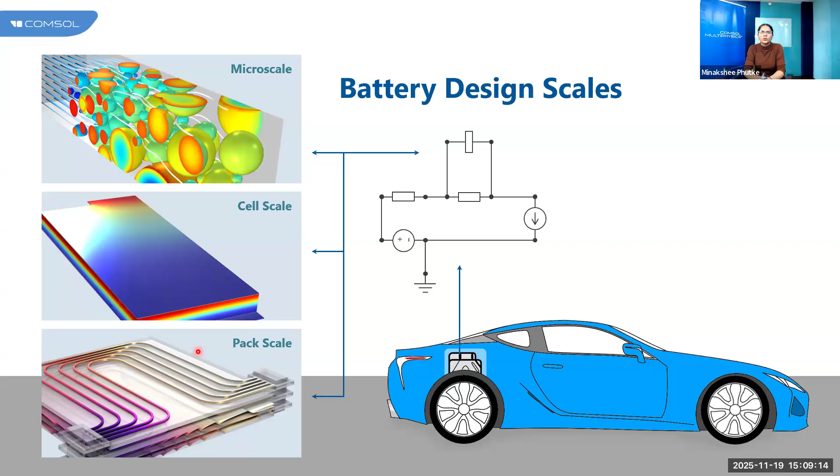On top of that, in case you have a battery pack which is installed in electric vehicles and you want to take the approach of equivalent circuit modeling, that scale approach is also available in COMSOL Multiphysics. So no matter what your objective is for battery modeling and simulations, you can work in COMSOL and make use of the different modeling types available, which are shown here in this presentation.

Here from left to right, when you move from heterogeneous to lumped model, your model becomes more and more approximated. Your accuracy is reducing. However, your computational cost is drastically reducing. So your computational time will reduce if you take the approach of the lumped model compared to the heterogeneous model.

In case of the heterogeneous model, which is a more sophisticated model compared to other models, you can actually use your geometry, like you can give a particle size distribution of your electrode, how the particles are distributed in your electrode. You can give the actual tomographic information of your electrode structure. The microstructures can be captured, how the porous structure is created at the micro scale level.

You can capture that, and here you can do all types of studies, from fundamental studies, EIS studies, to parameter estimation or kinetic studies, or testing out some new battery chemistries, or mixing different cathodic materials for your battery in case of a lithium ion battery. All such applications can be dealt with here with the heterogeneous type of model.

And in case you don't want that much accuracy, and you want the simulation a little faster, you can switch towards the homogeneous model, where the famous Newman model approach is available. The Newman framework is there in the homogeneous model, where you can take average porosities of the various components in your battery, from electrodes to separator, and taking these average values, you can do simulations from electrode level to cell level to pack level.

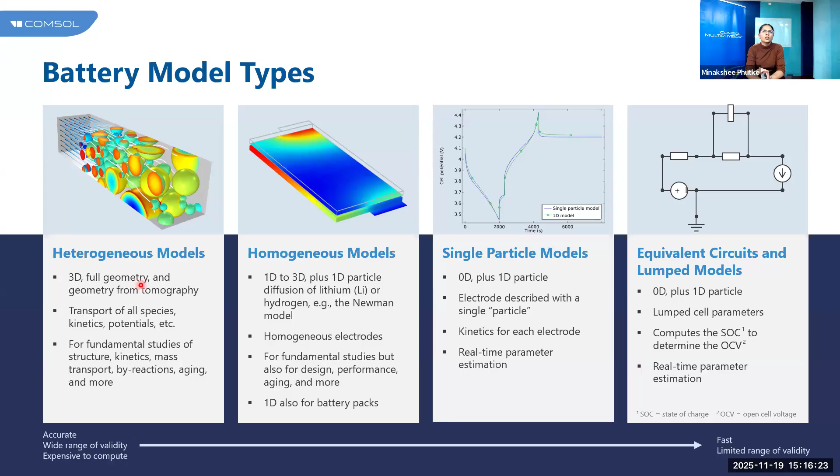So let's get into the surrogate model. We know that surrogate models are accurate and faster options compared to the actual physics-based model, where these simpler yet computationally inexpensive surrogate models can be trained to capture the behavior of your system, which may be very complex in nature. This surrogate model will help you create models which capture this complex behavior of your battery, while still giving you a faster and accurate solution.

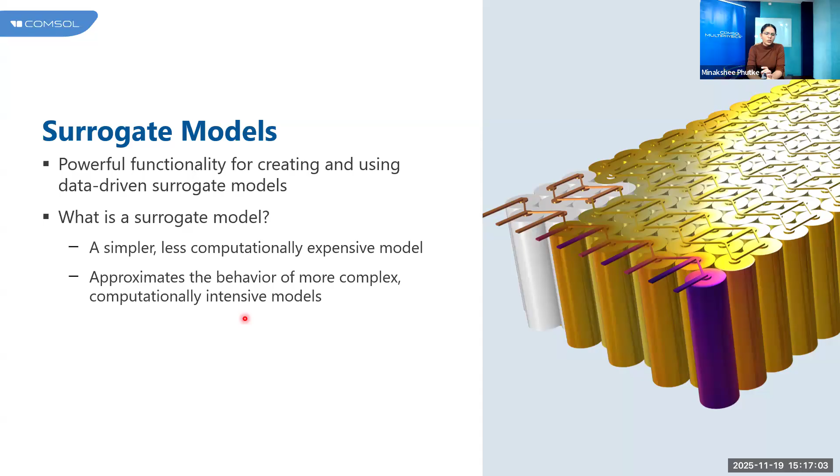So how can you build this surrogate model in COMSOL? Let's take a look at the workflow. First, as I mentioned, you can create a full model based on any of the earlier model types we discussed so far: lumped model, Newman model, or heterogeneous model.

So you can first create the full model, then create a design of experiment method. We use this design of experiment method to create a digital data table, a design data table. Once you create this design data table, you give inputs and outputs. So there will be data when the battery system is subjected to various charging and discharging conditions, or when you change some inputs for the simulations, showing what the output will be when you run this full physics-based model. All that data will be captured in the design data table.

Now, this design data table will then be used for training the surrogate models. The surrogate models will be trained on the data created from the simulations of the full models. And then this data can be used to evaluate the digital twin or apps.

In case the design data table is created and you want to train your model somewhere else, you can export this data to third-party tools. Or there's another way: you may have some data already and want to import that into COMSOL to train the surrogate model. That option is also available. So you can import data from a third party as a design data table, then train the surrogate model in COMSOL and create the digital twin.

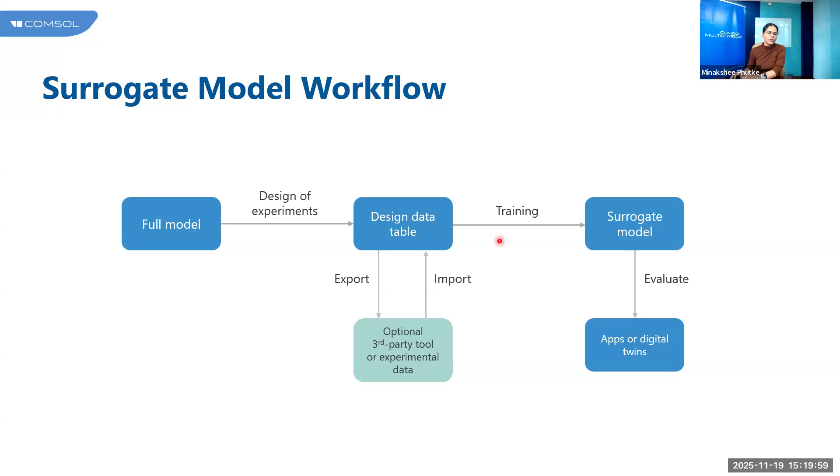This option is useful in case you have some experimental observations, large data from the system. You can bring that into COMSOL Multiphysics and simply use our surrogate model techniques to create the digital twins. So we offer a platform for any of the exercises mentioned here, and how it can help us is what we'll look at now.

In surrogate models, we usually create these models to build simulation apps which work much faster compared to the full-scale physics-based model. If you change some input, you need to wait to get the output—every time you change the input, you need to simulate the model again. So the computational time can be very high when doing this manually.

But once you create the design data table and train your surrogate model, you now have a lookup table where the input-output behavior is already captured, and your model is trained based on that data table. So it knows the system very well, and once the surrogate model is trained, you can get the result in a couple of seconds. This fastness of the surrogate model is particularly useful for creating digital twins. You can also use the surrogate model for uncertainty quantification and optimization of your battery modeling and simulations.

So various options are available, and all these options can be used for the various applications for creating apps or digital twins, so that you will get efficient battery modeling options with COMSOL Multiphysics. So let's take an example which we will discuss in detail in today's webinar.

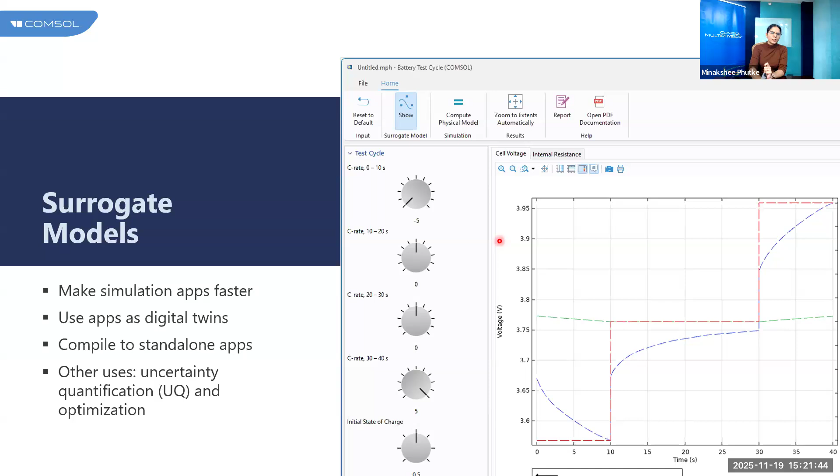That is the battery test cycle app, which we have created within COMSOL Multiphysics environment in order to demonstrate our capabilities when it comes to surrogate modeling. So we have considered a full Newman model in 1D, and there we have given the test cycle in 4 segments: 0 to 10, 10 to 20, 20 to 30, and 30 to 40.

In these 4 different segments, if you change different C rates and even the initial state, like if you are interested in checking the changing initial state of your battery, all these different things can be given as input. Then this model is created, and in a couple of minutes we'll check how we have created the model, and it gives results in a couple of seconds.

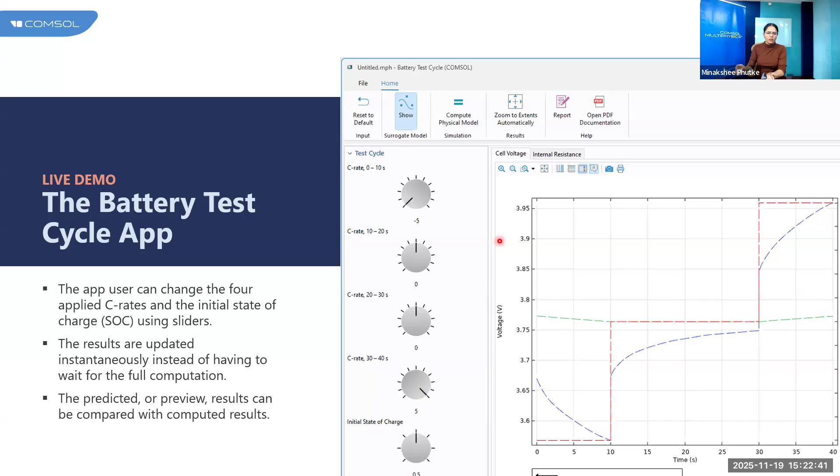So this is the model. This is just a glimpse of what we can do with COMSOL Multiphysics. Let's check here. In this animation, you can see that just by rotating the knob, you are instantly getting the result of potential, how the cell potential is changing when you change different C rates in different segments. And if you change the initial state of charge, you can see how it's affecting the battery behavior.

So this you can see in this particular example, which is for an NMC graphite battery, which is trained based on the Newman model for these 4 different segments of time, where by giving different C rates, the change in potential is observed.

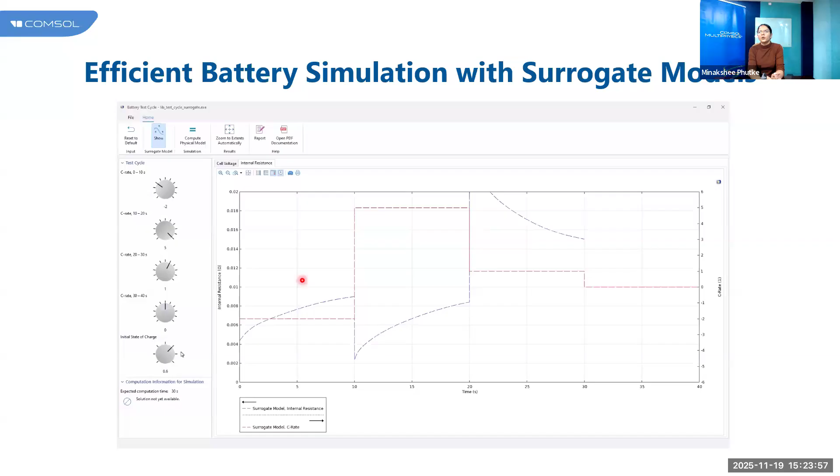Like that, you can quickly create such kind of apps in order to study your battery system in detail. So before going into what steps we have considered for creating the model we just saw...

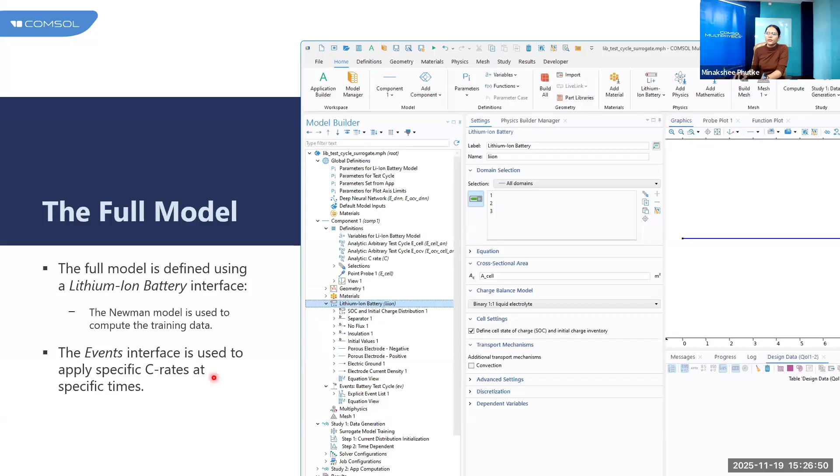Then once the full model is set and you have one simulation, later on we can add this step, which you are seeing over here, which is surrogate model training. When we switch to the demo part, I'll also show the further options for surrogate model training that are offered by COMSOL Multiphysics.

So here you can see in the screenshot as well that in the surrogate model training step, we decide what are the input variables and what are the properties we want in the output. So what quantities of interest we want as output parameters can be selected over here. What inputs we want to change can be selected here.

So here you can see that, as I mentioned, there were 4 segments, from 0 to 10, 10 to 20. So in each segment, what kind of current you want to draw, or what kind of current you want to supply in case of charging, can be given with the C-rates. It can be negative or positive based on discharging or charging. And you can consider that SOC is one of the main input parameters. So initial SOC will also matter.

So we can give these as 5 inputs, and we can take outputs such as the potential of your battery, that is E cell, and the OCV of your battery you can calculate. So these are the quantities of interest for output. So we can select quantities of input and quantities of interest as output over here in the surrogate model training option.

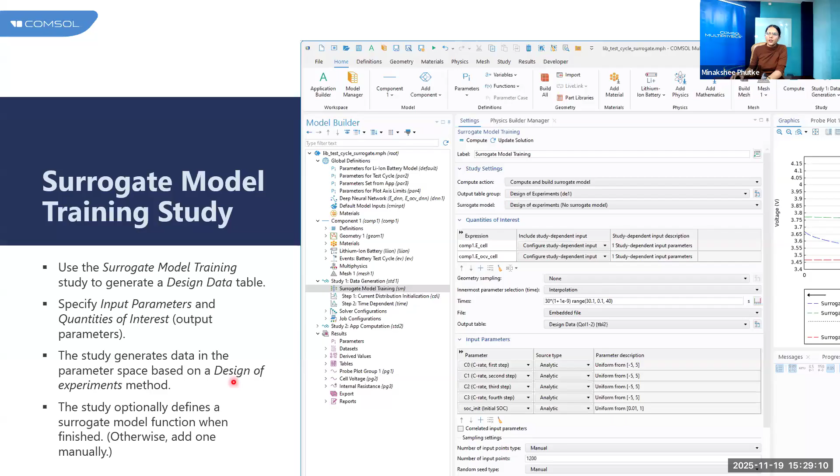So there are multiple options available. Multiple activation options for training are also available in COMSOL Multiphysics. So the different surrogate model functions available in COMSOL are deep neural network, polynomial chaos expansion, and Gaussian process functions.

Here in this particular session, we'll discuss the deep neural network functions, but the other functions which are also available, such as polynomial chaos expansion and Gaussian process, we will not discuss much in detail today, but you can check out these two options as well. And we do have these three different function options in COMSOL Multiphysics.

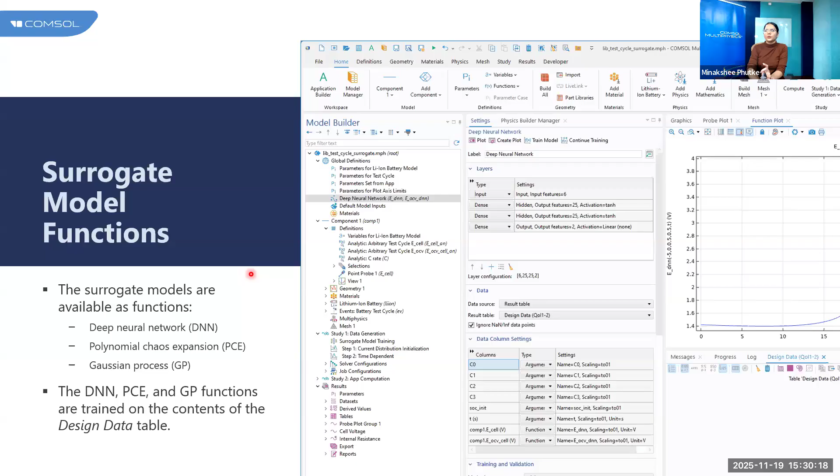Deep neural network functions come with the COMSOL Multiphysics software. However, for PCE and Gaussian process, one might need to buy add-on modules such as Uncertainty Quantification. But only with COMSOL Multiphysics and the Battery Design Module, you can use the deep neural network and train your surrogate model. So you can create the design data table, and the deep neural network can then be used to train and create surrogate models.

Let's go into more details about the DNN configuration, like how the DNN works. So in deep neural networks, what is most important is the layering. So you have some inputs and outputs. Once you have a design data table, how your output can be correlated to the input with different layers can be captured with the DNN layers.

These hidden layers of the DNN can be of any number. Typically, if you increase the number of DNN layers, the model becomes more and more complex, and there is a possibility of overfitting your data. So there might be a need for an educated guess to know how many hidden layers you can use. A quick rule of thumb is that you can start with two layers, and then if you feel that your surrogate model is underfitting, like your model is not good enough to capture the complexity, you can further add layers. And inside layers there will also be a number of nodes or neurons.

So now, how many neurons should be there? For that also, prior study, prior knowledge of the problem you are modeling is needed. Typically in case of battery simulations, with prior knowledge of what the problem is typically used for, with how many layers and nodes, you can take it as a guess value, and further with study you can get these numbers. We do have 2-3 different surrogate models there. You can take that as a reference and create the number of hidden layers, and give the nodes.

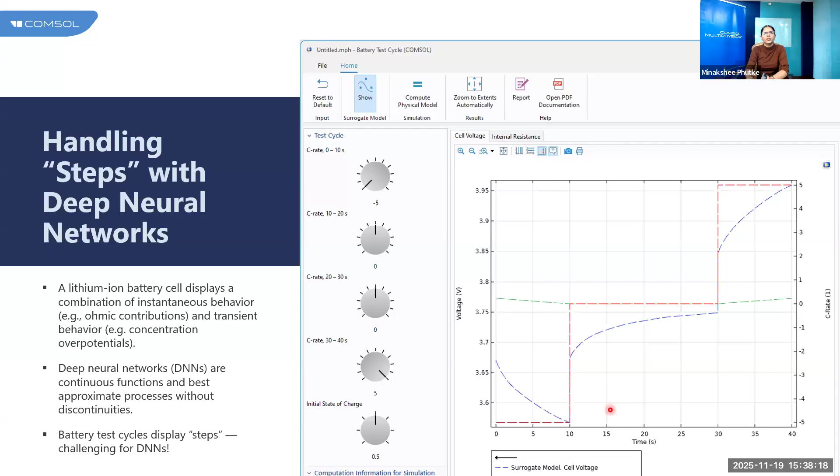So in the technique I just mentioned, time series stitching, we have different time segments in which we are giving different C rates. The states can be different in batteries, because once we switch from charging to discharging, the battery initially reacts instantly, and later on it reacts slowly. To capture this instantaneous and transient behavior, if we use a single DNN function, it might oscillate like this. Here you can see that in this segment the model is right, but in this part it starts oscillating.

In order to avoid this and effectively train your surrogate model, with time series stitching we can divide the time into 4 segments of 10 seconds. First we train our data for one of the segments. Let's take the last segment: if we keep the SOC and give one initial C rate and train the data in this segment, the model is trained for that SOC, and we have given the window from -5 to 5C. So we have the whole spectrum of C rates, whether discharge or charge, and we have trained our model for both conditions with that particular SOC node.

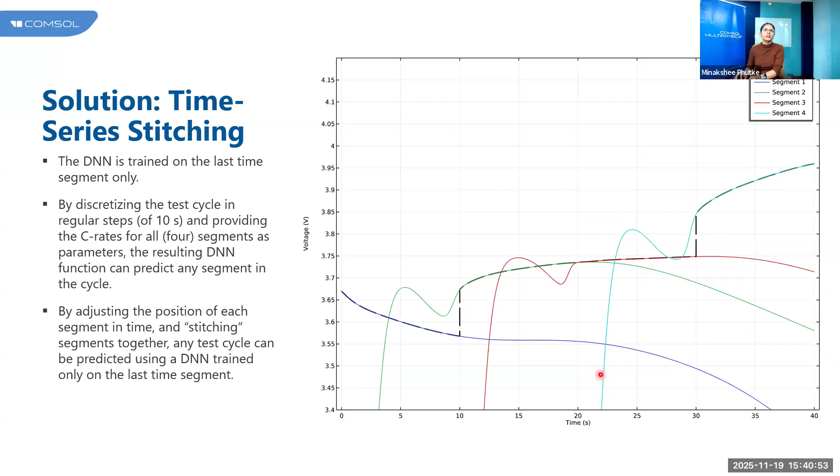So like that, we can train our model in one of the segments, preferably the last segment, and then shift the model according to its C rate. Provided the C rate, it will automatically behave like a discharge or charge curve as required. Based on that, you can shift your segment, get the trends like this, and stitch the whole segments together to get the full cycle.

In detail, here you can see that the first step to model is that we take the last segment, 30 to 40. We take that segment of 10 seconds and say that initially there is no C rate, and instantly we have one SOC initial state of charge, and we are giving one C rate in this segment. So 0 to minus 5 is here.

Here we'll train for -5 to 5, and one SOC is given, and you can get a trend like this. This blue here you can see. And now what we'll do is we will shift these segments back in time by creating T plus 30. And once the segment is shifted back, now you can see the same blue line is shifted back here, and it is following the dashed line given by the Newman model.

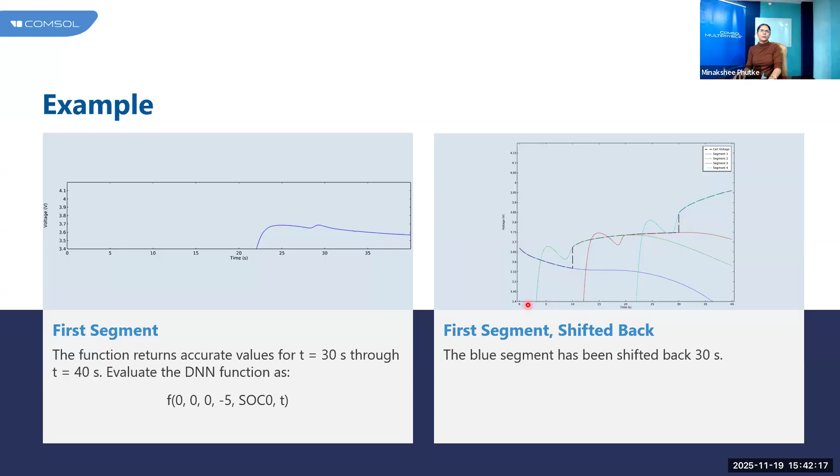Like this, once the model is trained between minus C rate to plus C rate, and with that particular initial SOC, you can use the same behavior and give the different SOCs in different segments and get the behavior from your test cycle. Here the final is -5. Here we are keeping it as a rest 0 and then we are charging with 5. That behavior is captured. So discharge with -5, then rest for 20 seconds and charge with 5. See here you can see that behavior captured by stitching the time series.

And then you can create the algebraic function in order to shift your data. So here we just train data in 30 to 40, and then we shifted it back here for this initial segment, and accordingly we have given the C rate. So initially it was 0 C and then 5, and then we shift it back here, and then once we come forward, we adjust it like -5, 0, 0, 5 like that. So like this we can write an algebraic function and give it for the surrogate model training.

So this is the time stitching series technique which can be used for discontinuous operations, if you want to use the DNN functions to create the surrogate models for such kind of discontinuous problem. And one such complicated problem is simulated and demonstrated very well in COMSOL Multiphysics. And these are the details of this.

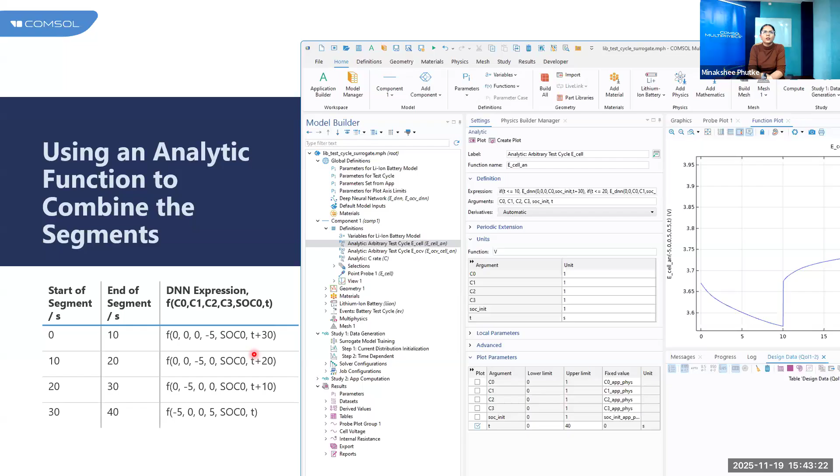So the advantages we are getting by using the method of time-series stitching is that because we are only training our model in one segment, there is no need to train your model again and again in different segments. So we are saving on training time. However, the limitations are such that the segment you are using should be uniform in your test cycles, or else at least there should be a multiple of the uniform segment.

In this particular case the middle section was for 20 seconds, but we can split it in 10 seconds and change it like this. So there should be a uniform time segment in order to create such kind of drive cycle testing for battery. And the smallest time segment is very important. If it's a multiple of your segments, the smallest segment you need to consider in order to train the data.

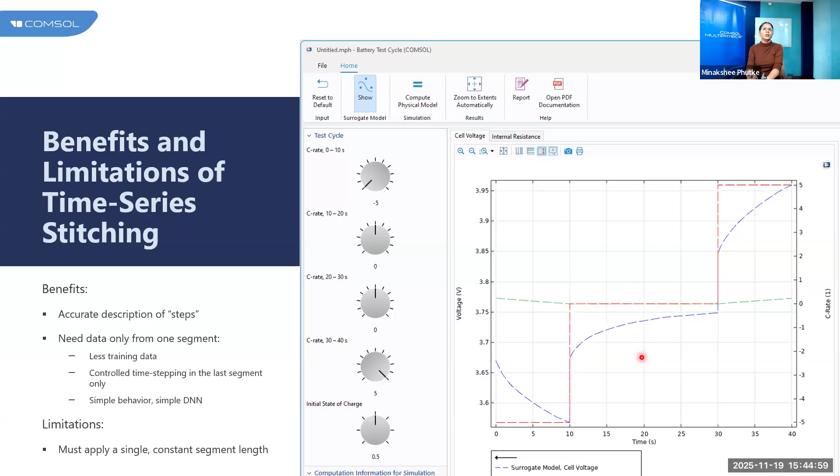So again, based on a lot of DNN architectures, you can train this, and there are a few limitations as I mentioned. Again, there are a few benefits also, that you are doing the training only once, so you are saving on your training time. So like this, the different techniques for creating surrogate models can be adopted in COMSOL Multiphysics, and you can tackle any battery simulation problem and create different surrogate models for your battery simulations. So this was the example for that one.

Let's go to the software and actually see the example we just discussed. Just give me a couple of minutes. Yeah, this is how when you launch the COMSOL Multiphysics software, you'll end up with this interface where we have multiple options over here. But now I would like to show you the model we have just discussed. So let's go to that model.

With COMSOL software itself, you get the application libraries, and in the application libraries the model we have just discussed is there. On top of that, another surrogate model for the battery rate capability is also available. Then for how to create a digital twin simulator or digital twin analyzer, all these different models are here in the application library. You can check out all these models. They are very interesting models for battery simulators. And let's go into details of this particular case of lithium-ion test cycle surrogate, which we have discussed in today's session.

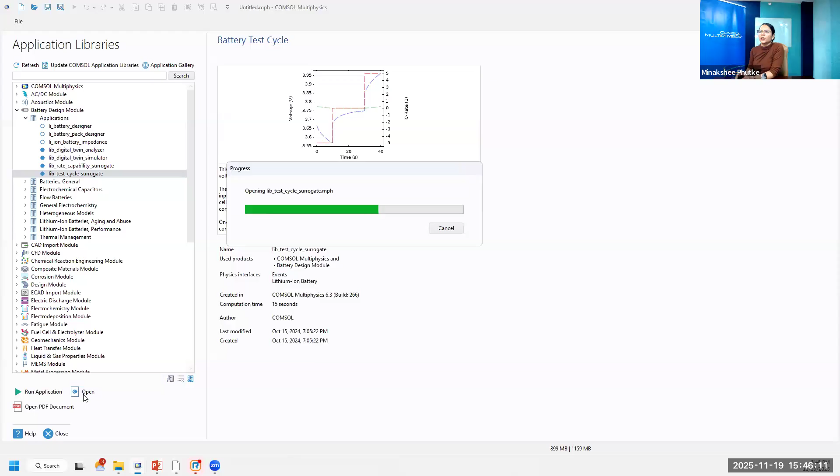Let's open this model and let's get into various options that are available for modeling the surrogate model with COMSOL Multiphysics. So here you can see that, as I mentioned, we are using an NMC model, an NMC lithium-ion battery. A 1D model is considered, with the Newman approach; the physics setup you can see over here.

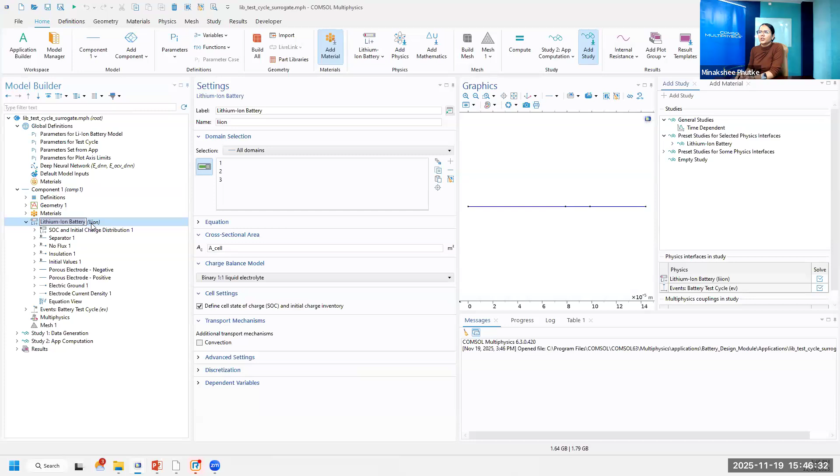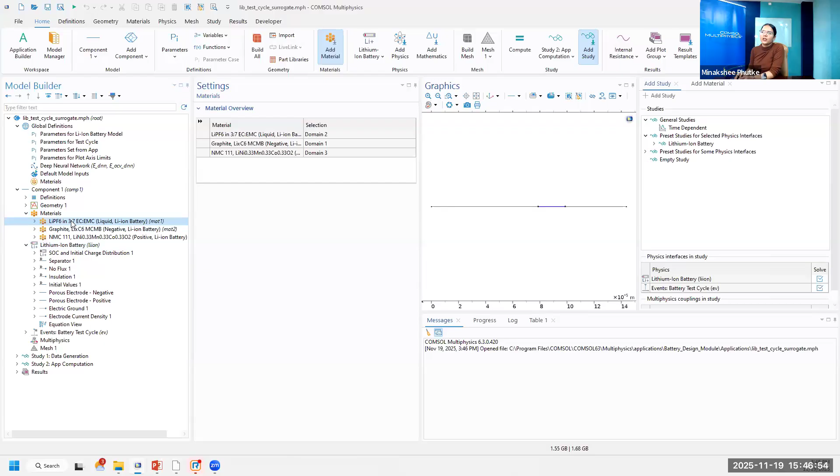So normally when you simulate any problem in COMSOL, these are the general steps that you take for creating a model. Once the interface is selected, you can opt for the different materials. You can make use of the material library of COMSOL, where different anodic and cathodic materials and their relevant parameters, properties, and variables are already defined. So you don't have to put a lot of effort into creating battery models in COMSOL Multiphysics.

For all the standard chemistries, we have a dedicated material library, which is updated every time according to market research, whatever batteries we have in the market, we update our library according to that. So we have a lot of materials for battery simulations, which you can make use of in order to create a model in a few steps in COMSOL Multiphysics.

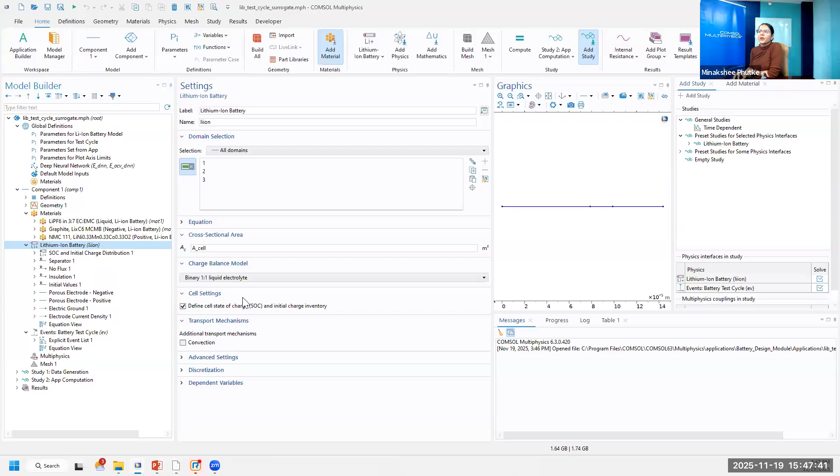And then you can choose the type of model. Here the Newman model is chosen, which is the lithium-ion battery model, where by giving the state of charge and your battery capacity, you can specify your negative electrode and positive electrode. You can consider intercalation effects. You can consider the kinetics of your battery reaction, the electrochemical reaction. And in order to apply the drive cycle, you can use the event function.

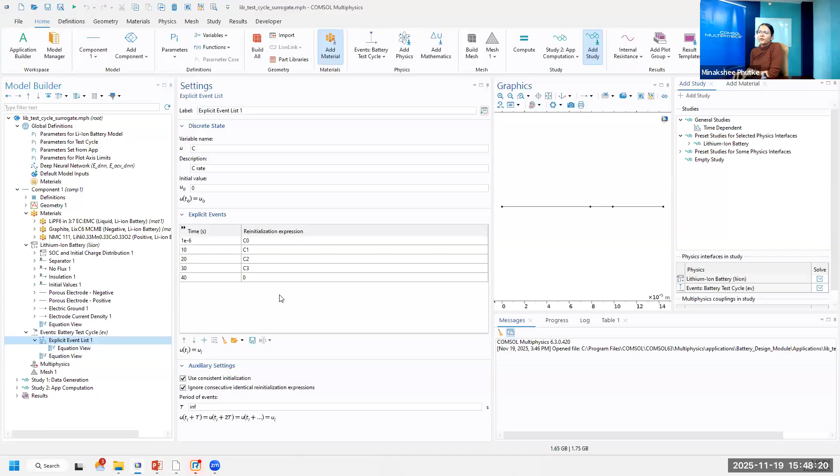So here you can see that the event function is used to create this C variable, where you can give the mode of charge and discharge. In this particular case, as I said, we have created it for 4 segments, from 0 to 10, 10 to 20, 20 to 30, and 30 to 40, in which different C-rates can be given. Here you can see that we have given different C-rates for charging and discharging. When we sweep the charge from -5 to 5, both charge and discharge can be considered in the same one.

Once the events are created and the model is created, after the time-dependent study, when you right click, you get the option of surrogate model training. Now that option is already selected here. Here you can see that the surrogate model training options are added. Now here you have two options. Either you can build the table and train over here, or you can just create a design data table.

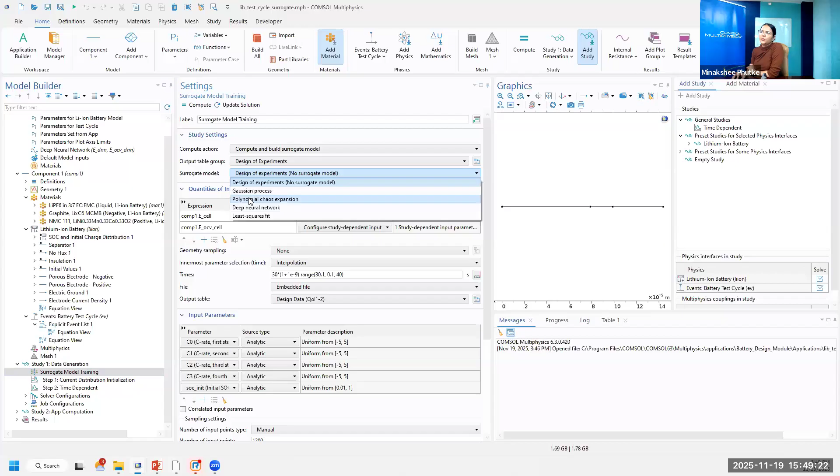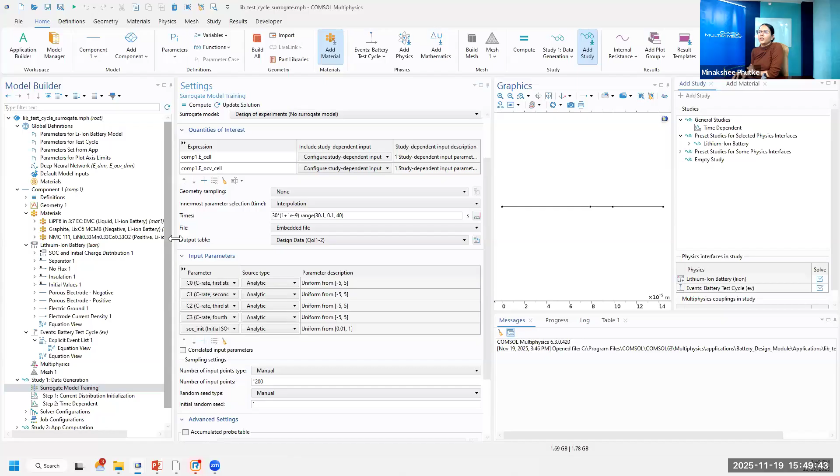Here we have just selected the option of creating the data table with the help of the design of experiments method, and the inputs and outputs are chosen over here, and we are creating the design data tables. Once the design data table is created, you can go and train your surrogate model. In global definitions, when you right click, you can see that functions are available such as DNN, PC, GP. You can check the DNN option here, or whichever appropriate function you want. For this particular case, the DNN option was chosen.

Now we will decide about the architecture of the DNN. So here the input and output layers will be there. In addition to that, as I mentioned, we have added two hidden layers, and the configuration is given here: for the two hidden layers, we are using 25, 25 neurons. And the activation function options you can browse from here. These 5 different activation functions are available in COMSOL, which you can use to train your model.

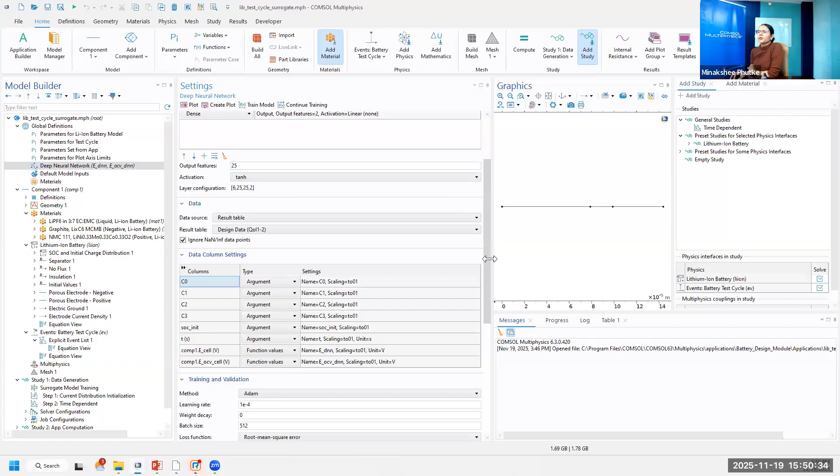And once the activation function is chosen, you can train and validate your model based on different advanced optimization techniques such as Adam or SGD, the stochastic gradient descent method, or the adaptive moment estimation technique. You can make use of any of these training and validation methods and train your surrogate models.

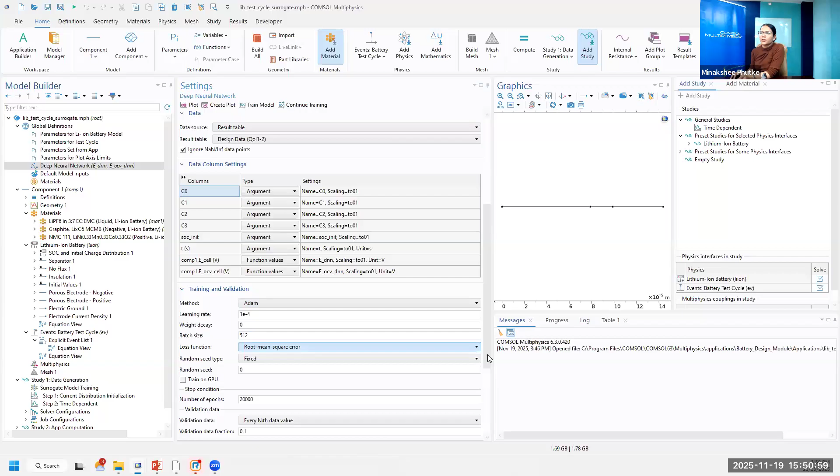You can give the epochs here, so you can change the epochs, which is like how many times you want to train and validate your data. More epochs will give better fitting and better convergence.

So based on an educated guess, you can select a minimum number of epochs initially required. First you start training the model, and in case you've trained it for some time and want to fine tune it, you can make changes and continue training. So you have multiple options for surrogate modeling with the COMSOL interface.

So these are different options available in COMSOL, and from here you can find these options of DNN, PC, GP, and creating the design data table. Here you can export. Let's look into the design data table we have created.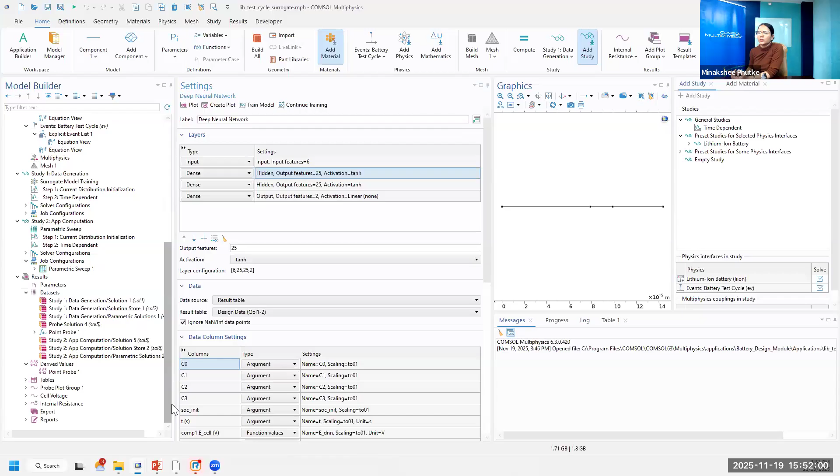So you can create the design data tables. It's not required to only use the surrogate model here. You may want to use other surrogate functions to train your battery problems. You'll have a design data table in the data set, so let's go here, and it will take you to the design data table.

So here is the design data table created for 5 inputs and 2 outputs, but these outputs are with respect to time. So we have 2 outputs and 5 inputs—this is how you get the design data table.

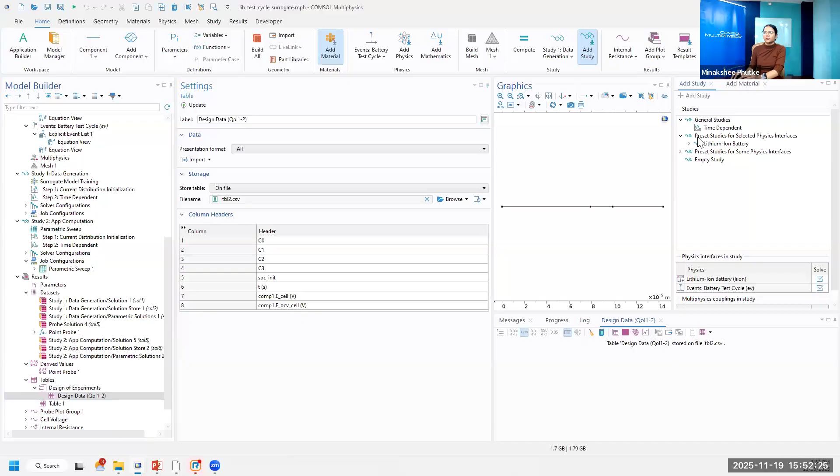So that is for today's session on surrogate modeling with COMSOL Multiphysics. In case you're interested in checking out other options, there's the battery rate capability model, which is trained to get the Ragone plot for lithium ion batteries—that surrogate model is also available for plotting the Ragone plot for a battery.

And in case you want to see how space-dependent problems are handled for surrogate models, you can check out one more surrogate model, for the tubular reactor, which we created for chemical applications. There you can also check out different surrogate model techniques or different DNN architectures we used to train this model.

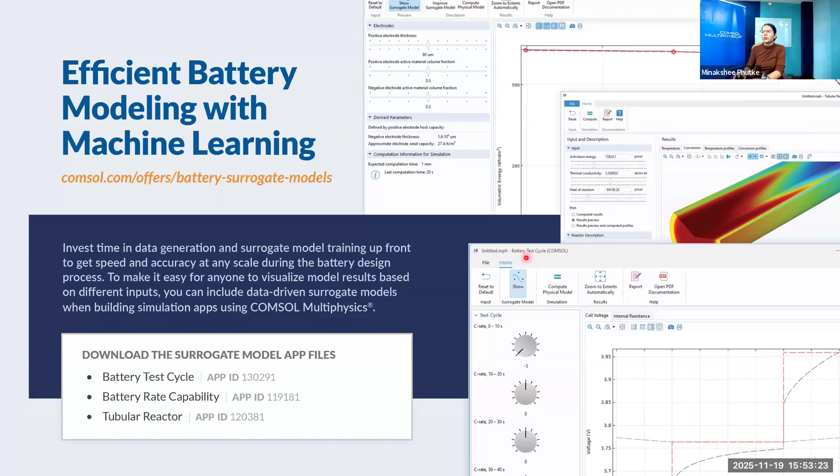So by visiting all these different models and digital twin options showcased in the application library, those models are available for you to make use of and further train yourself in surrogate model use with COMSOL Multiphysics.